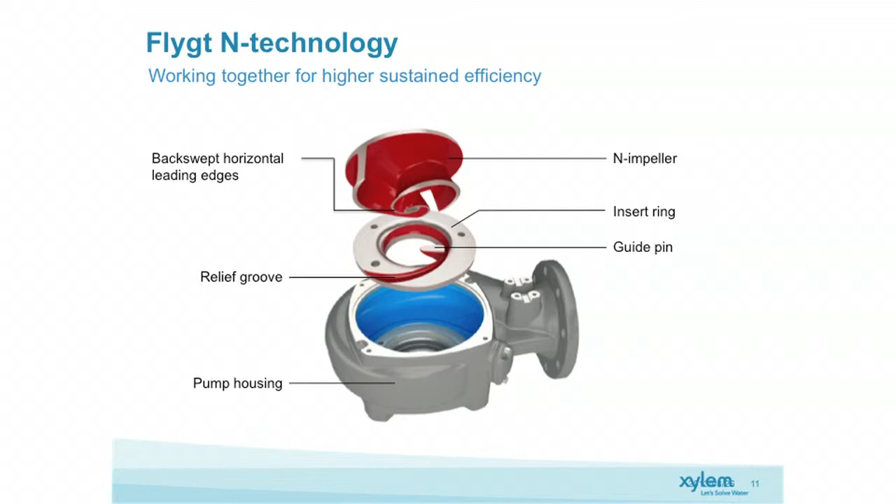So Flygt N technology is basically about three different functions that are working seamlessly together. First one is the back swept leading edges. You find them here. And this is the area that first hits the water. So please remember that. And then we have the guide pin. And last but not least, here painted in red, you can see the relief groove.

I have an animation with me, so I will be able to further illustrate how it's working. But before I do that, I will try to explain. So what's happening in the pump housing is that the debris will enter the inlet, and the back swept leading edges, together with the guide pin, will push the solids out to the outer edge of the pump housing. Then it will pass along the relief groove out through the volute and pump.

So the self-cleaning is actually about letting the solids slide along the leading edges out through the pump. This animation, here is from the side and here is from underneath. I will turn it on and explain again, but please first have a look at the smaller image here.

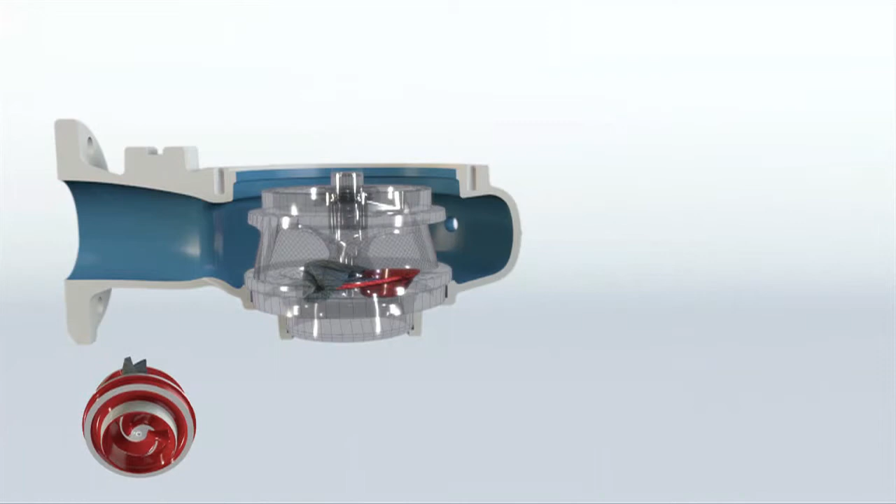So now you see the solid passing through the pump smoothly, and we take it in slow motion. And while the solids are passing, you will see how the leading edges together with the guide pin push the solids out, and then it's sliding along the relief groove. And this self-cleaning design will reduce the consumption of energy.

We often say that we deliver sustained high efficiency. I hope you know it by heart, but anyhow, I will explain it also. How can we achieve energy savings? When we look at typical conventional pumps, we have run tests in our laboratory, we can see that the debris is building up over time. And with sustained high efficiency, the definition of that is actually that the pump can keep its initial level of energy over time. That's the definition.

Meanwhile, with the conventional wastewater pump, what will happen is that the energy consumption will increase. It's using more power. And the reason for that is something that we call soft clogging. The debris is building up on the leading edges. It seems like the pump is running efficiently, but in truth, it uses more power.

Of course, you can run a pump intermittently. You start the pump, and over time the debris will build up and it uses more power, and then it stops, and the solids will be flushed away, and then the pump starts again, going up to the same energy level, etc. But over time this will also increase the energy level. But with an N-pump, you will have sustained efficiency over time. And that's why we say that you can save up to 25% energy with N-technology.

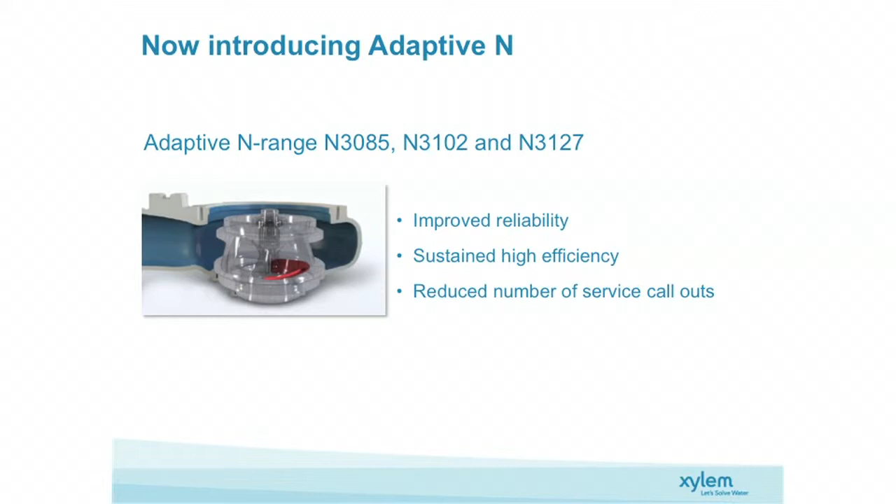Now we have a crystal clear picture of what an N-pump and N-technology is all about. And now I'm glad to introduce Adaptive N. The Adaptive N technology is based on the same principle as the N-technology. We are introducing it on the 3 smaller sizes in this range, up to 7.4 kilowatt. And what it will deliver to you is improved reliability. I will explain soon how. And it will still deliver sustained high efficiency. So the technology is actually about the smaller sizes of pumps.

It will run smoothly as it always has, but if larger debris enters the pump, it won't stop. What will happen is that the impeller will actually move upwards, and then the hydraulic pressure will take the impeller down to its original position. And this happens in just a split second. Another positive, apart from the reliability, is that the pump's lifetime will increase, since it reduces the stress on the seal and the bearings. So that's also a benefit that you will get.

I can talk a lot about animations and illustrations here today, but I think it's more exciting to see something from a real installation. So before I came here to talk about Adaptive N, we made a film in our laboratory. As you know, wastewater is unpredictable, but it's also hard to film. So what we have done is try to illustrate wastewater by using plastic bags, plastic bottles. We also have socks, t-shirts, dishcloths, and some underwear. Typical things that you can find in wastewater.

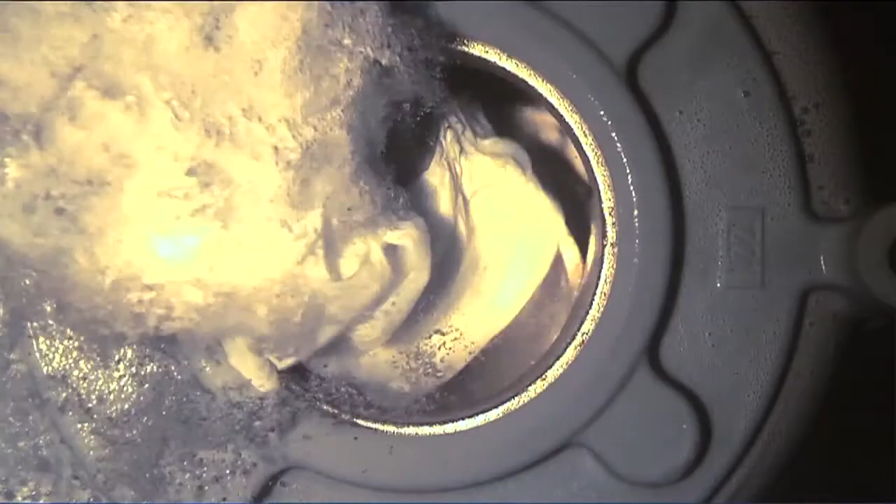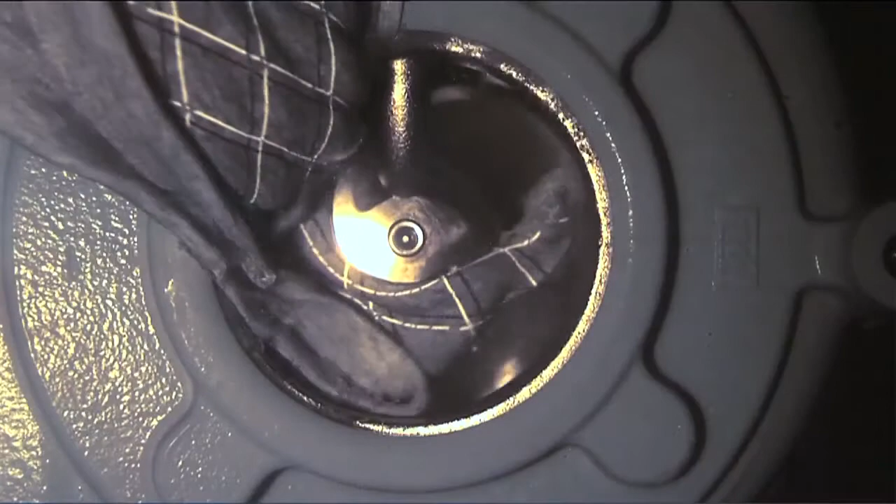So there is the plastic bag, bottle, that's the t-shirt. This is actually my favorite, the dishcloth, so have a close look soon. So now with your refreshed level of knowledge when it comes to N-technology, you can see how the solid was pushed through to the outer edge.

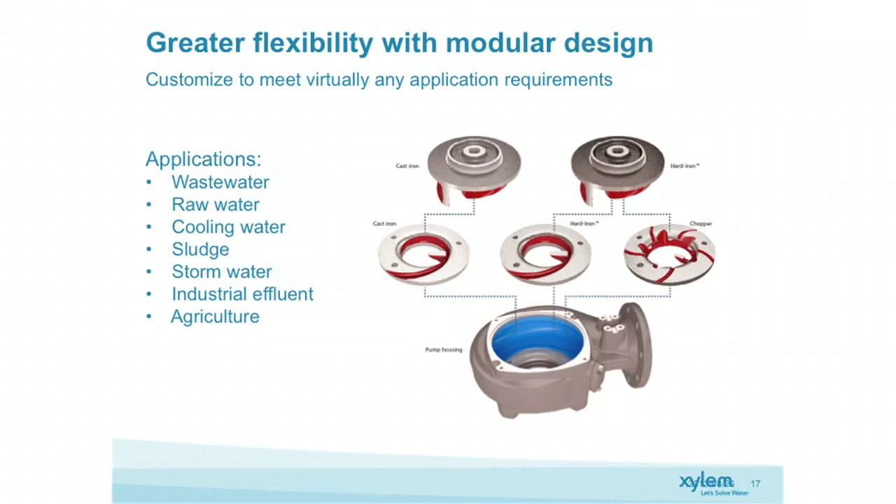With that, I also want to mention something that we have done to further enhance our N-technology, because there are challenging wastewater applications out there, and we want to have a broad offer for those as well. So we have developed new impeller materials. Our standard version for what I'd call normal wastewater is the cast iron impeller. But now we also have a hard iron impeller. Hard iron material is really suitable for applications with a lot of abrasives, like sand, for example.

And then we also have a chopper version. The chopper version is typically used in applications where you have long fibers. What the chopper version will do is actually cut the fibers into smaller pieces, letting the debris pass through smoothly.

And then, before we move on, because Flygt Experior has 3 new technologies, I just want to summarize the N-technology. It's about clog-free performance thanks to the self-cleaning functionality. You will be able to save up to 25% energy thanks to the sustained high efficiency. And we also have a broad product range, with different materials to choose between, depending on your specific need.

Okay, let's move on to the next one. It's about the motors. The motor is something that we have been working on since we introduced the first submersible pump in 1947. So this is nothing new for us. We even have our own department within our product development. But we haven't been so good at communicating our capabilities.

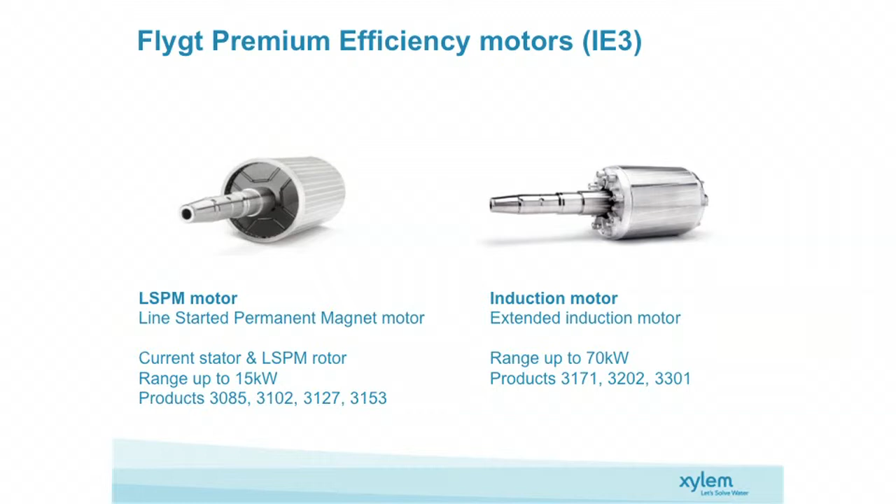But now it's time to introduce new premium efficiency motors on the full range up to 70 kilowatts. We have chosen 2 different motor technologies. For the larger ones, we have a conventional induction motor. But for the smaller ones, up to 15 kilowatts, we now have a totally new technology for motors. It is called LSPM, and it stands for Line-Started Permanent Magnet Motors.

The benefit with this new motor technology is that it can be started with any method since it's line started. But yet it will have all the advantages of a PM motor, a permanent magnet motor. That means that you will have high efficiency, and also the pump can be run very smoothly even if you reduce the speed of the motor. Additionally, you will also get a lower running current with this motor design.

Something that is very typical for a Flygt motor is that it is very small and compact, but yet very durable. I will come back to that later.

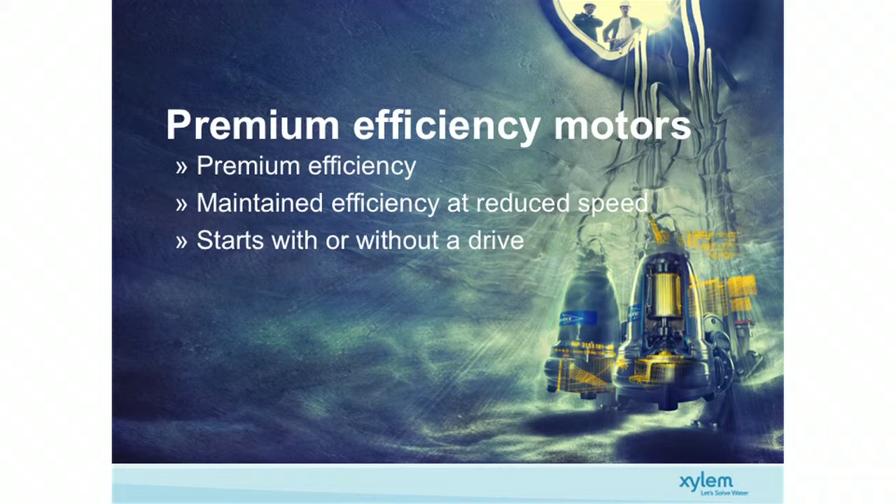So to summarize, premium efficiency motors. We have premium efficiency motors that meet the IE3 regulations on the full range. For the LSPM motors, we also supersede the nominal standard by 4%. For the LSPM motor, you will maintain efficiency at reduced speed, and you can start with any starting method. That means that you don't need to have a VFD for the smaller sizes.

And now for the most important part, a really new technology that we are bringing to the market, and that is the intelligence. Or as Benny said this morning, it's more than intelligence, it's really about being smart. And this new product is called SmartRun. Why did we choose then to focus on intelligence?

What we have seen during the past year is that customers more and more use VFDs to run the pump stations, to control them, which is good in itself. But we have seen that challenges often occur. Challenges such as odor, debris being built up, you can have clogging or sedimentation in pipes. And one of the reasons for that is that setting the parameters right for a VFD is quite difficult. It's very hard to optimize it for wastewater since it's so unpredictable.

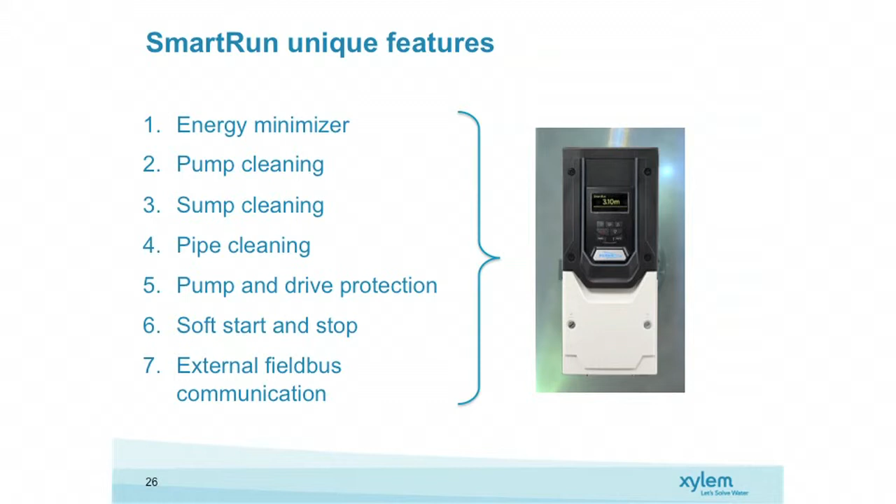And some of the functions that you can see in SmartRun are listed here. It's an energy minimizer, pump, sump and pipe cleaning, pump drive protection, soft start and stop, and then external fieldbus communication. So with those functionalities, you will be able to improve reliability and save up to 30% energy if you compare SmartRun with an on-off control.

I will now walk through these one by one and explain how they work. I will start with the energy minimizer. The energy minimizer is really, really unique. It's a patented solution. And what SmartRun actually will do is strive to run the pump at the optimal speed. So it will search for the optimal speed every day to find the best duty point depending on your specific system design.

This is something that normally requires a lot of calculation and theory, but now we have embedded the algorithm into SmartRun. And since this is such a unique feature, I take the opportunity to describe it a little bit further by introducing Hanna, my colleague from Sweden. Hanna is an application engineer, and with us we have an animation. I hand this over to you. Thank you.

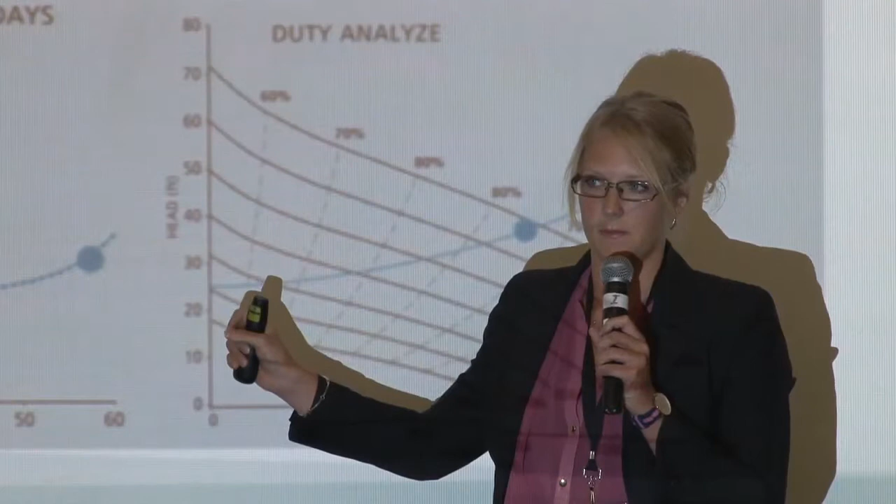And it does this by monitoring the energy that's consumed and also looking at the flow that's being pumped. And we usually talk about specific energy. And this is a specific energy graph. So specific energy is the energy consumed per pumped cubic meter of water. And for a specific system and a specific pump, you will get a specific energy curve looking something like this; it will be different depending on what system curve you have.

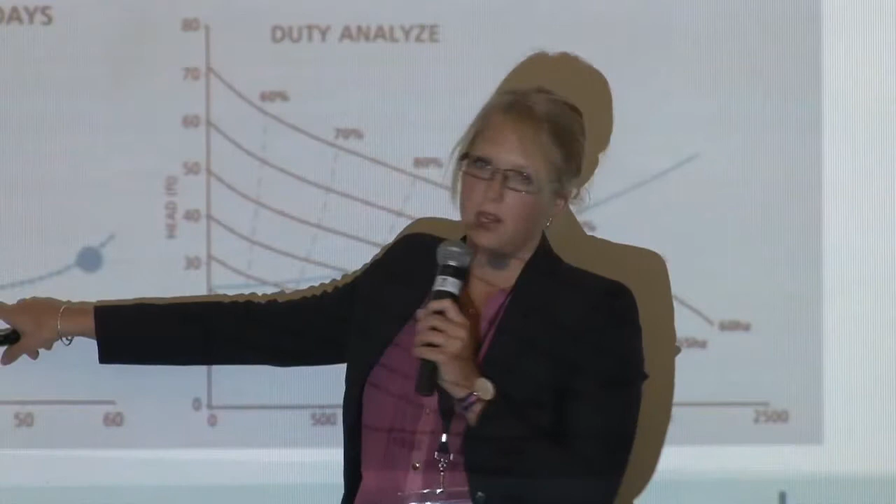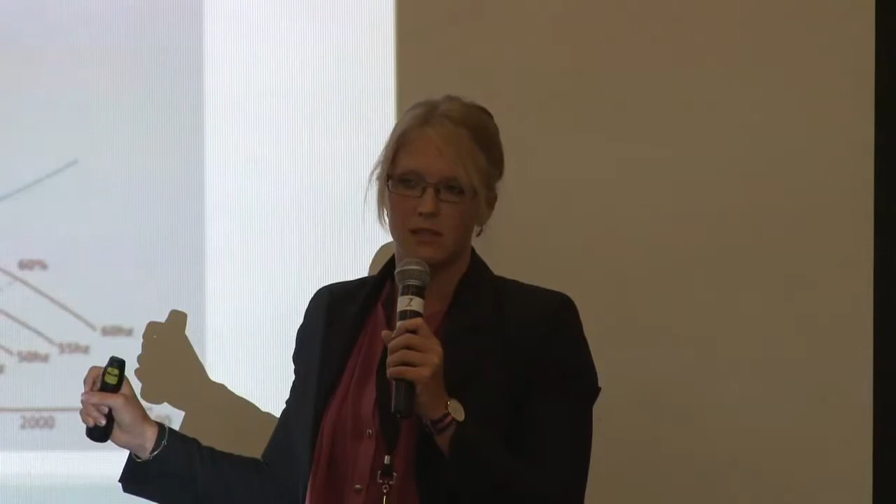So you have frequency here and specific energy. And as you see, there's always a lowest point on this curve. And this is the point that we want to run the pump at to be the most energy efficient. So SmartRun is always looking at its specific energy, going down in frequency and finding its lowest specific energy point, and will run the pump at that point.

So if you look at the graph at the top, we have pumped volume here. We have the frequency. This is actually a 60 Hertz pump, so it's going to start at 60 Hertz, then work its way down. And you can see the savings in energy when doing so. And here it says days; this pump is actually running just once a day. So it's going to change the frequency every time the pump runs. So if you have a pump running more often than once a day, it's going to find its optimum speed much faster. So it depends on how you run the pump.

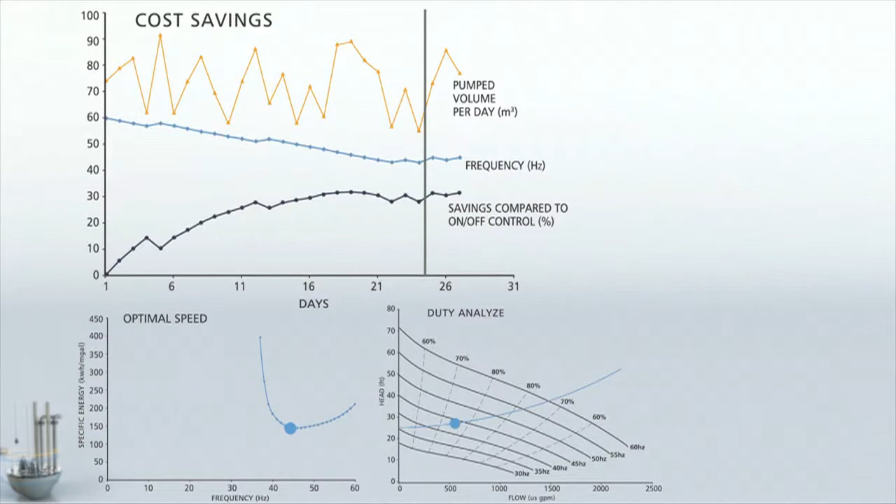And this is something that we will continue doing forever. So if you have some change of the system, maybe changing the water levels at the outlet, or something else changes to the pipes, you have higher losses or things like that, then it will adjust to the new conditions that you have. So you get automatic energy savings by just starting SmartRun.

Right. But then I have another question for you. When we are presenting Energy Minimizer, we often get the question about high inflow. Yes. As Veronica said, reliability is one of the main customer values, of course, with pumping. So we want to be energy efficient, and it's going to run at the most optimum speed for most of the time. Well, for almost all time.

But just in case that you have a really high inflow coming into the station, of course we want to adjust to that. So SmartRun is always also monitoring how the water level is going down. So if it notices that it's pumping at its optimum speed, but the water level is not going down, then it's gonna go up in frequency until it reaches the speed where the water is actually being pumped down. So we can take a look at this animation as well.

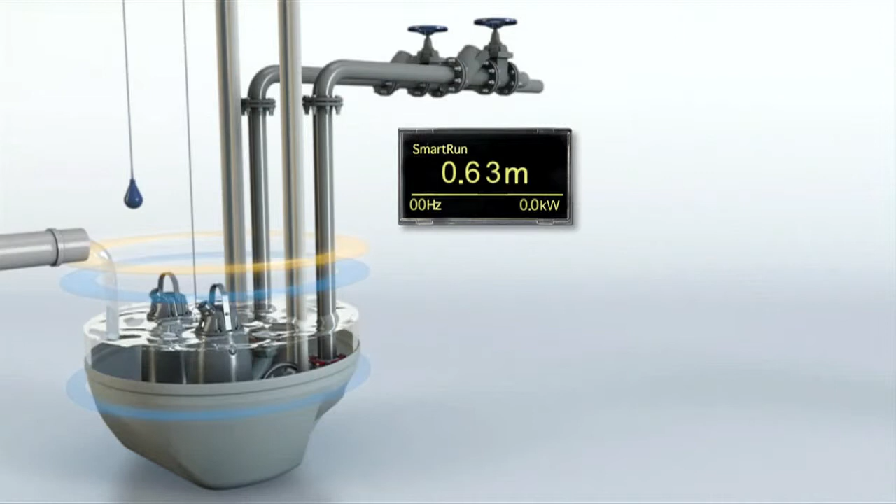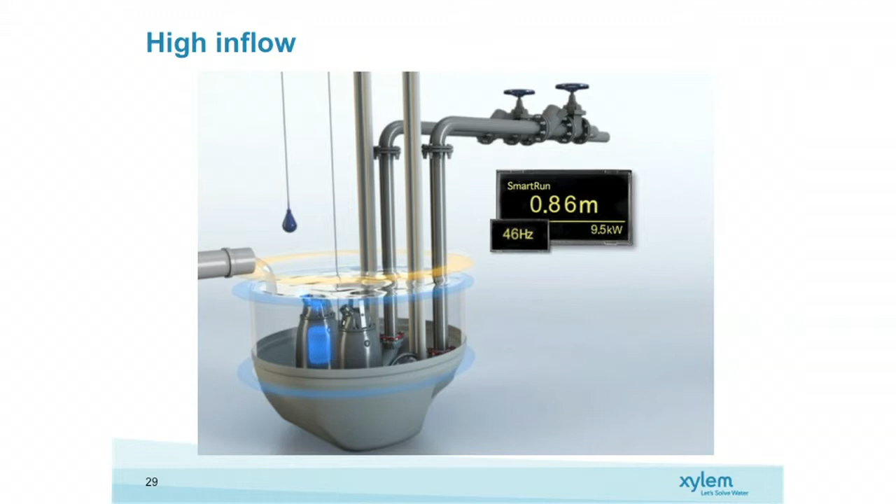So you're going to see the water level is going up, and it's going to start at optimum speed. But realizing, well, the water is not pumped down, I have to go up in frequency. But as you saw, it didn't have to go up to full speed. It just saw that, okay, with 46 Hertz, I have enough speed to actually pump down the water. So that way, we always make sure that we don't flood the station. It's always going to pump the water away.

And if you have a really extreme inflow someday, maybe it's a yearly rain or something like that, then it will actually trigger and start the second pump as well. Since we want to have reliability, we don't want to flood our stations. Right. Thank you.

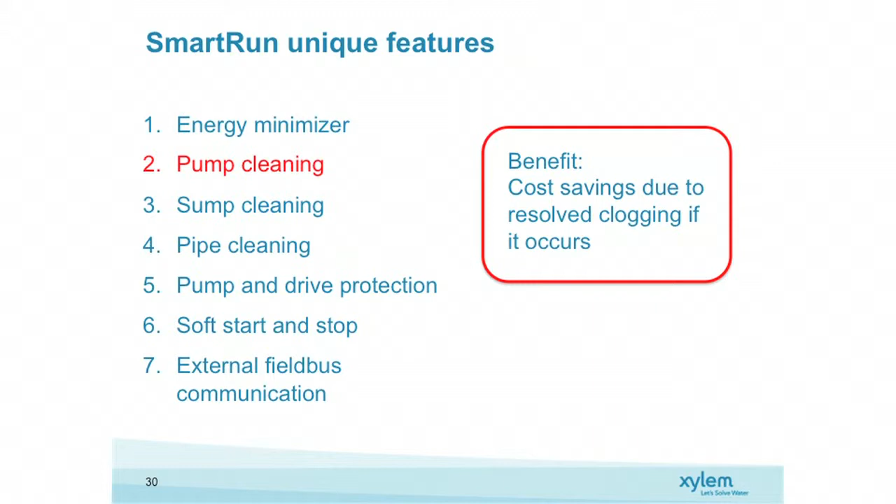And by that, I think it's time to move on to the second functionality. It's called pump cleaning, or as I rather call it, clog detection. The reason why we have developed this function is because we want to be sure that the pump is running trouble-free. In case a normal sized object is in the impeller, SmartRun will detect that and start a cleaning cycle. That means that the impeller will run back and forward until the debris has been released.

Then sump cleaning. What SmartRun will do here is that it will run down to a snoring level, and then it will pump away the floating debris and also the sedimentation in the sump. So what you will get is less odor and of course a clean sump bottom, but also you will reduce the labor and maintenance cost. And in cases if you have to do this work manually, this will also be reduced, of course.

Pipe cleaning is about taking away sedimentations in the pipe. So SmartRun will start the cleaning cycle at full speed so that the sand, etc. in the pipes will be moved away into the system. Actually, the pipe cleaning is taking place every 12th cycle today, together with the sump cleaning.

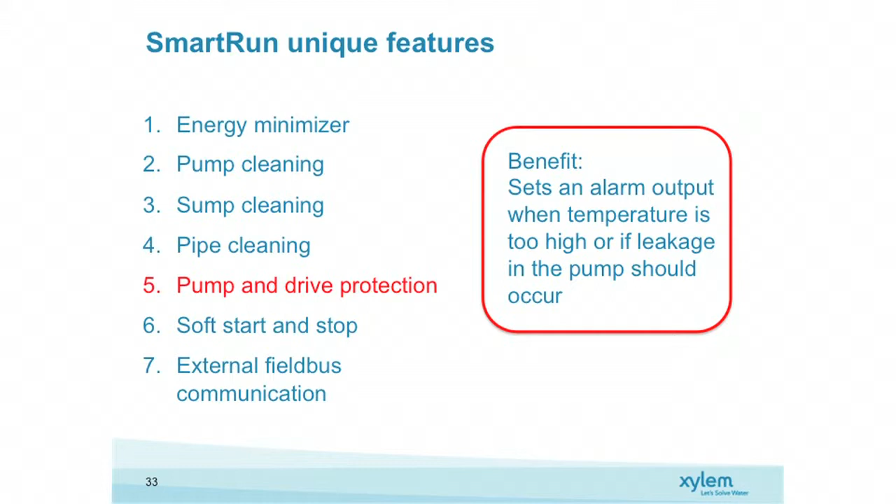Then we have the pump and drive protection. Of course, it's essential to get an alarm if the pump is overheated or in case there is leakage into the pump. And SmartRun will then send an alarm.

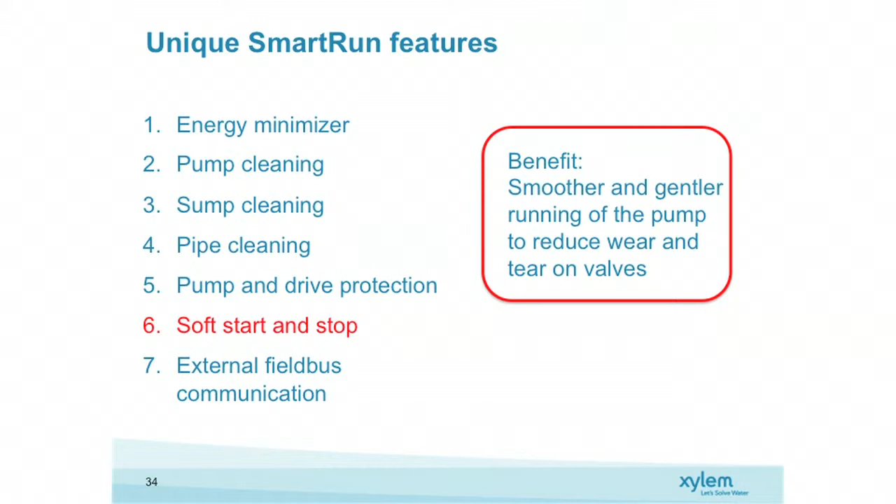We also have the soft start and stop. That means that we will run the pump very gently. We will slowly ramp up at start and slowly ramp down at stop. That means that the lifetime of the valves will be prolonged, and at the same time we reduce the wear and tear. And additionally, this function will also make sure that you don't have any water hammer effects in your piping system.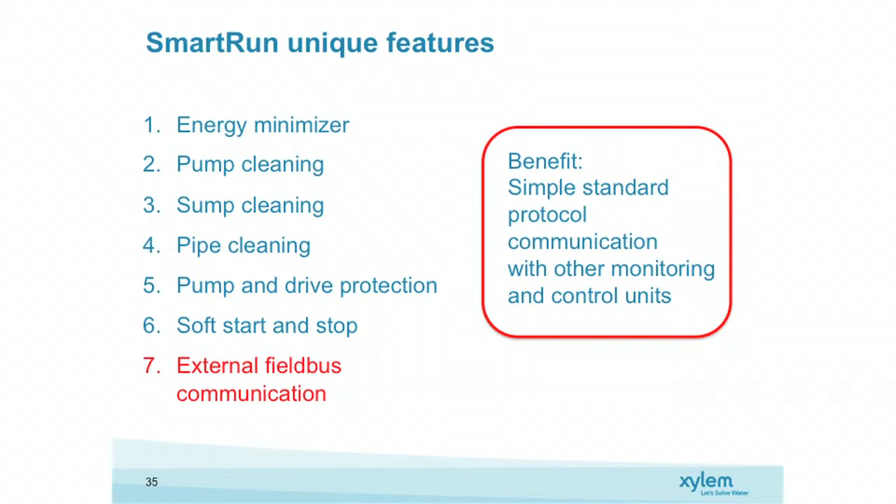One common question that we get is if SmartRun has a high capability to communicate with other systems. And the answer is yes, because we are utilizing Modbus. But in case you need to have other protocols, we have that as options as well. So all those functions are embedded, pre-programmed and preset. So it's really optimized for wastewater pump stations.

Again, to summarize them, as I said, pre-programmed and easy to install. You just have to press the button. You can reduce energy up to 30% if you compare SmartRun with a traditional on-off control. And also, the reliability will be improved thanks to the pump, sump, and pipe cleaning functionalities.

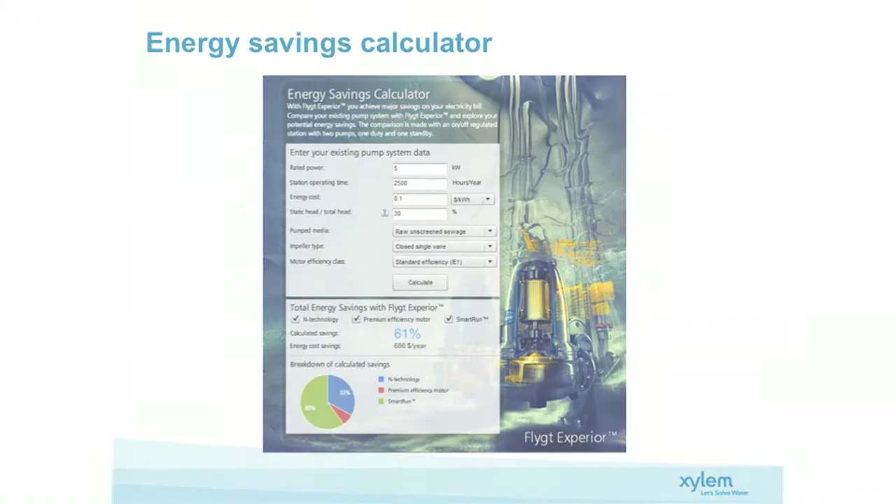Just to illustrate, we kind of like illustration and interactions. I have an energy calculator with me today. We state a lot how much energy you can save. But based on our experience, we have developed these tools so we are able to set the parameters depending on a specific pump station. So let us do one demonstration of this. I will walk this through together with you now, and in the breaks or when we're having a cocktail later today, we can show how it's working and do some calculation depending on your specific system.

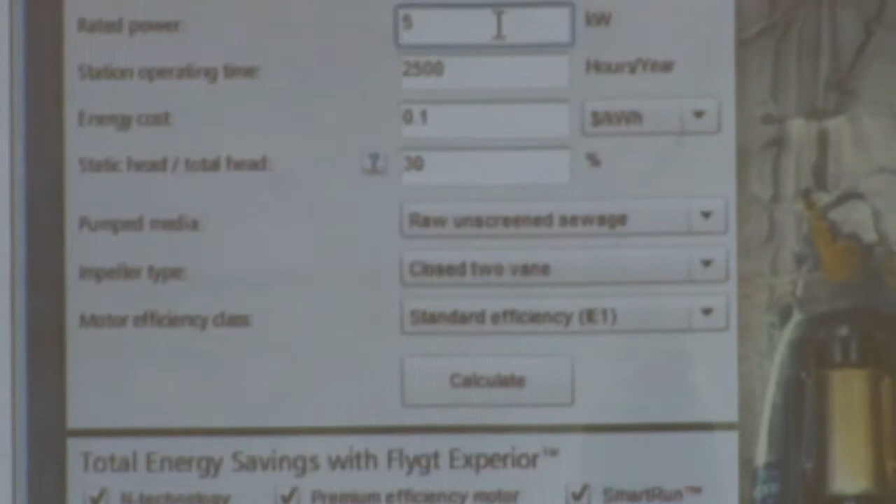So what we will do is to enter different parameters. If you have any suggestions, you're of course free to come up with them. We can increase the size of the pump, for example. Should we say 22 kilowatt? Then we have to enter the operating time. Any ideas? Or shall we keep 2,500 hours? Someone is agreeing? Okay, we keep that then.

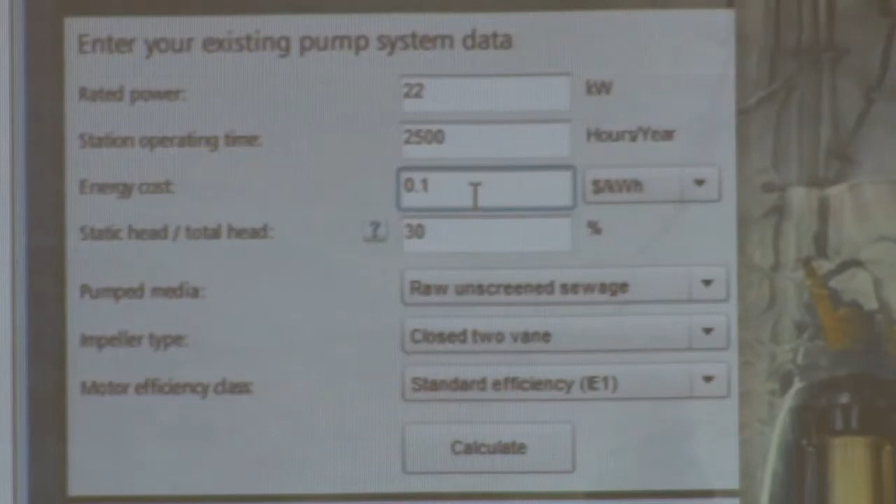You mentioned 50 cents as an energy cost here, US money in dollars. Is that correct as a parameter? The cost of energy? Is that reasonable? Point one was correct. This is in dollars, sorry, in euro or dollars? In dollars. 0.1. Like this. Sorry, thank you.

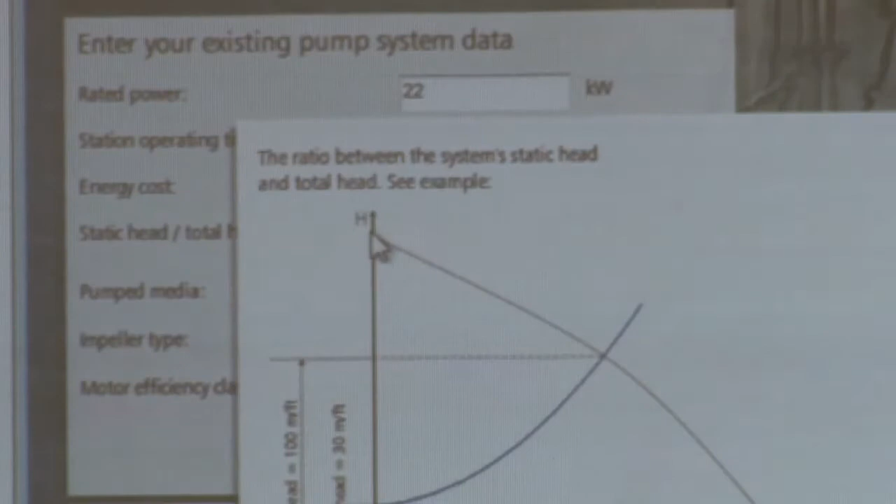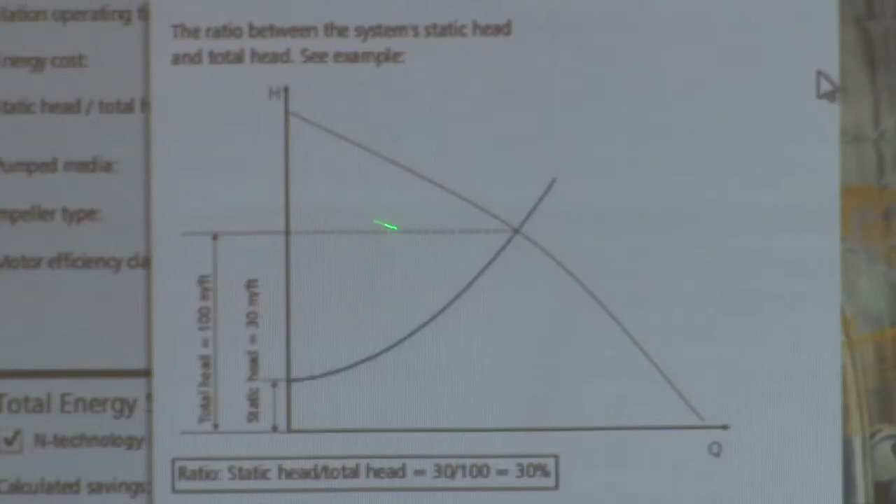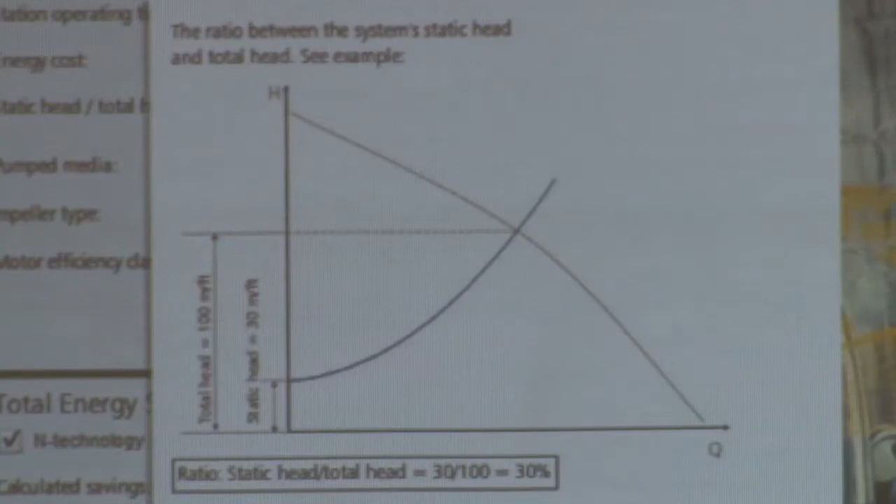And then we have the static head. I can show this illustration. We have added this so we can be sure that we get the correct data, because you need correct data to calculate. What it's all about is defining the ratio between static head and the total head. Here you can see a typical pump curve, and here's your duty point. That means that you have the total head here. Meanwhile, you also have to fill in the static head for your specific system. So by dividing those two parameters, you will have the ratio. In this case, it is 30%. We could increase it to 40, just to play around a little bit with the figures.

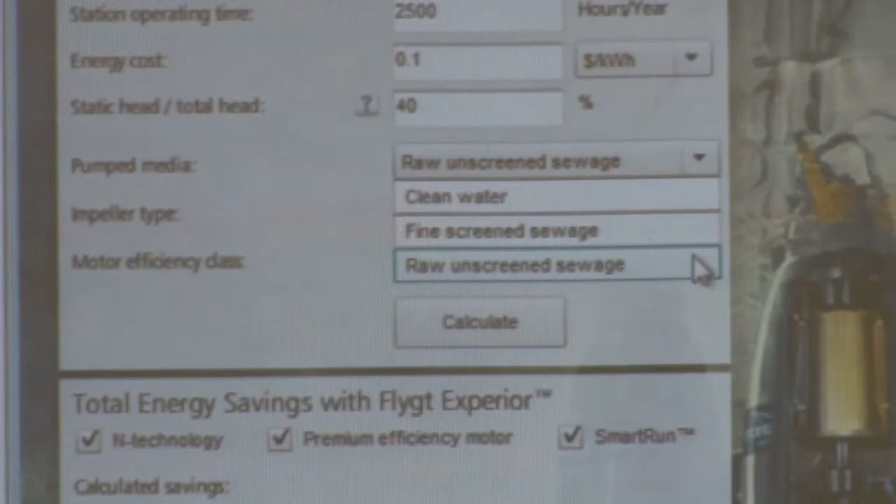Then you need to define, depending on your application, what kind of pump media you have. Here you can choose between clean water, fine screened sewage, or raw unscreened sewage. Any ideas? Raw, okay. And then we have the impeller type: open single vane, closed single vane, closed two vane. N-technology, maybe not in this case, screw or vortex. What is your best option? Closed two.

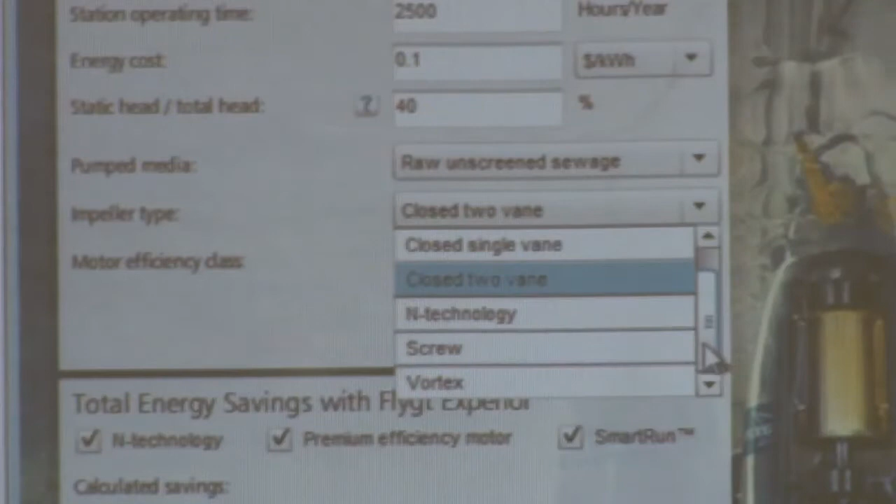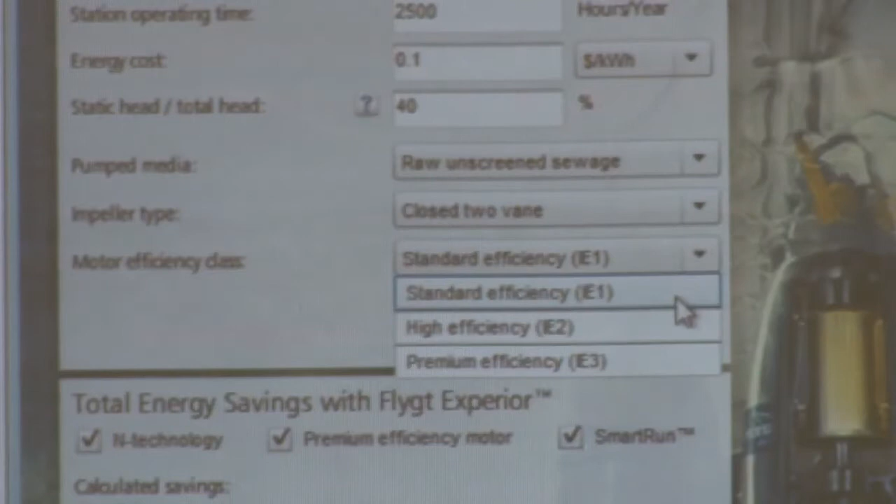And then we must define the motor efficiency. We have 3 different standards, the IE1, IE2, and IE3. My suggestion is to go with IE1 since it's most common. You agree, I can see, loud and clear. And now we are pressing the button.

That was good timing. Thank you for that.

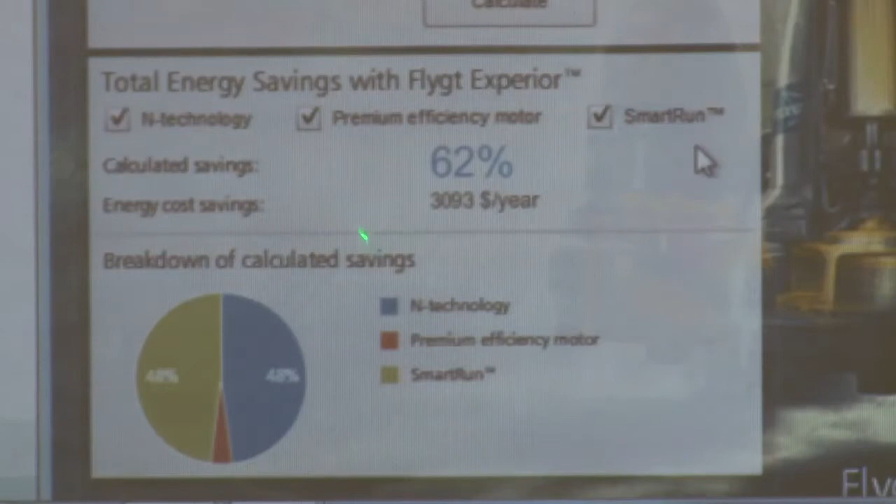If you don't want to add a premium efficiency motor to your Experior pump as an option, you can take it away and then we recalculate. And in this case, it's 50-50. So Flygt Experior, the way I should put it, my perception is that we have developed Flygt Experior with the premise that a premium efficiency motor always needs to be combined with state-of-the-art intelligent control and our superior hydraulic design. Because here is where you can find the savings.

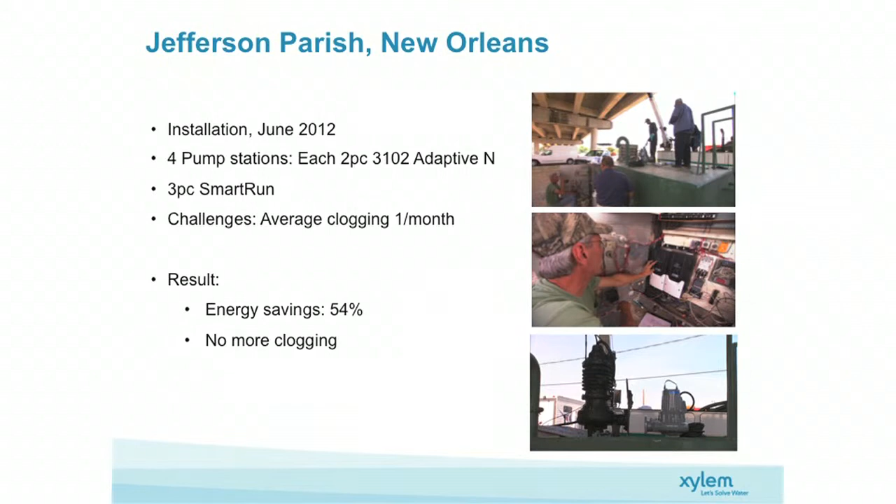So I will start first with a case from the US, from New Orleans, Jefferson Parish. The installation we did was in June last year. They had 4 pump stations with duplex installation. The problem they had was clogging. The pumps clogged about once a month, and one of the 4 pump stations even clogged two to three times per day. And now we are talking maintenance money. We installed adaptive N, and after the installation they haven't had any clogging at all.

And just to put some figures on that, one call-out costs about $400 US. You have to send 2 men, an electrician and a mechanical guy. So not only have they saved money on maintenance, but they have also freed up time for their resources. We also installed smart run, and they saved 54% of the energy cost. When we started the pump, the frequency was 60, and then only after 2 days it went down to 38.

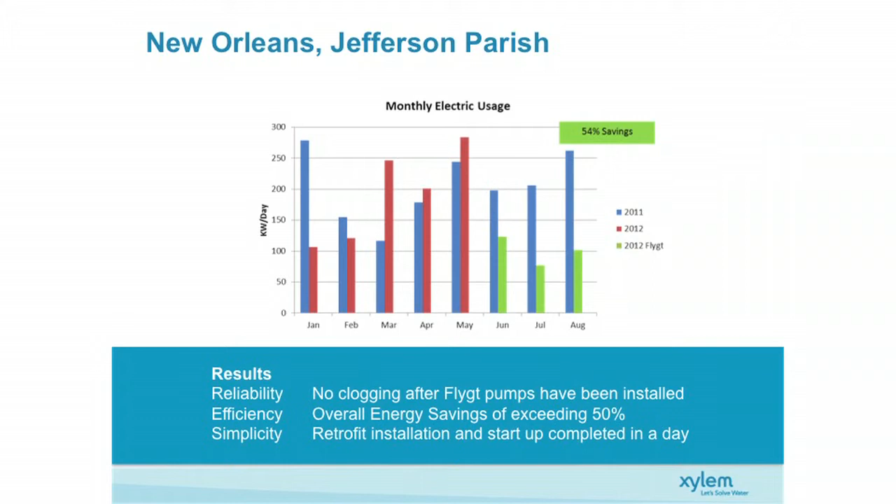Just to give you some graphs on that, you can see here in blue and red the electricity usage for 2011 and 2012. And we know it's changing year by year depending on weather conditions, etc. But in June 2012 we installed Flygt Experior, and since then you can see that we have reduced the energy. One thing I think is also worth mentioning, because I'm talking about simplicity, is that the retrofit installation only took 1 day. So this is really a good way to illustrate what we can achieve with Flygt Experior.

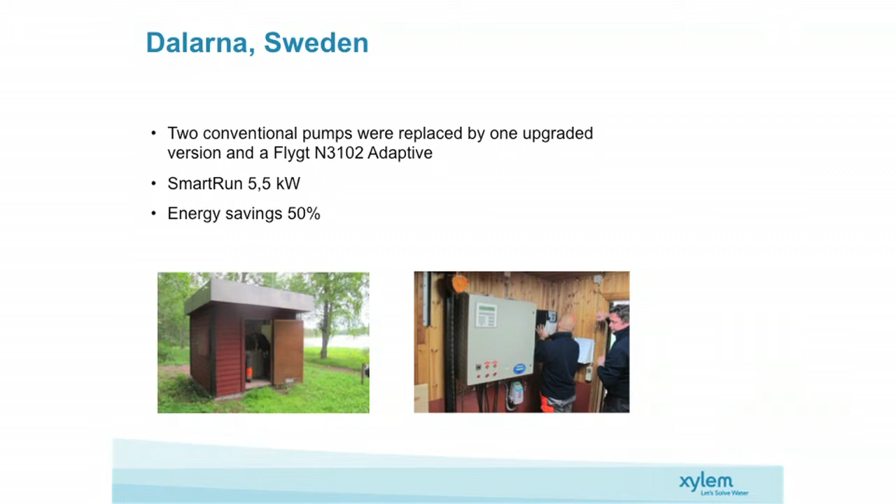And then, of course, I have a case from Sweden, which is close to my heart. We have 1 pump station in the middle of Sweden with 2 conventional pumps, 2 competitor pumps. The customer chose to upgrade one of the conventional pumps, and the second one we changed to an N pump with adaptive N. We also installed smart run in this installation, and we saved 50% of the energy.

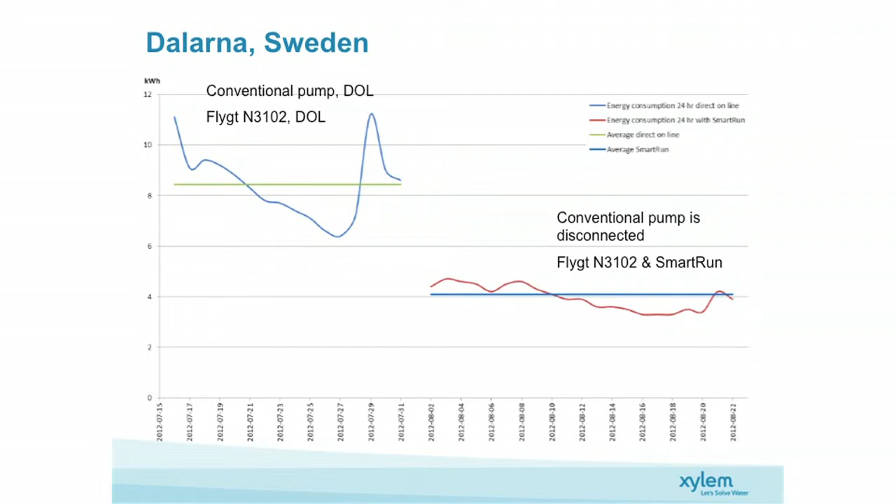I will show you here on this graph and walk it through with you. Here we have the conventional pumps running direct on line. The blue curve is the actual curve, while the green one is the average. Then we have the same, but now running the pump station only with an adaptive N pump together with SmartRun. And you can see that we have reduced the energy to 4, and before that it was slightly above 8 kilowatt hours. So this is how we can achieve 50% savings.

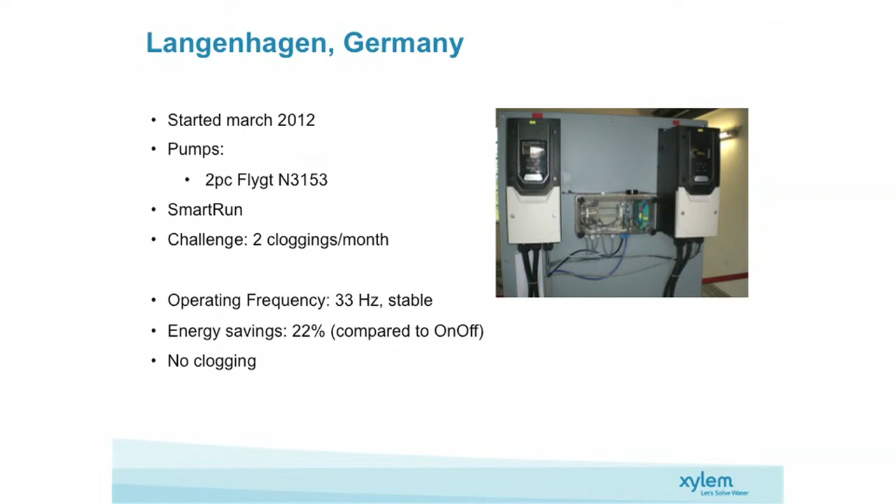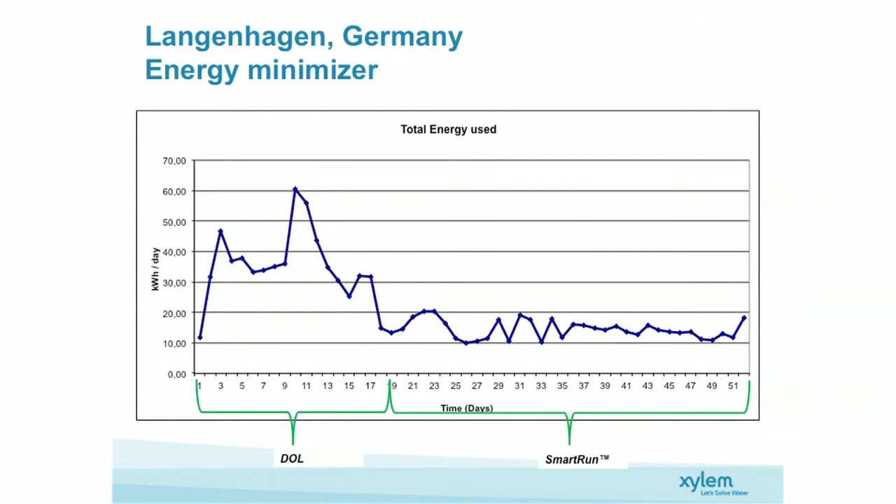Last but not least, in Langenhagen in Germany, we have installed SmartRun and also Flygt N pumps. As you can see, their challenge was clogging, 2 cloggings per month. What we have done is reduce energy by 22%, and we have no clogging today. And here you can see the curve as well. Here is direct online, and then with SmartRun, we have reduced the energy consumption. Interesting here is to see, as Hannah explained, how fast SmartRun will adjust the frequency. Within only 1 day you can reduce the energy.

So to summarize Flygt Experior, with the hydraulics, intelligence and the motor, we now have unmatched reliability for wastewater pumping stations. You are able to reduce the energy by 50%, and it's easy to use, easy to install and operate. So with that I have, of course, another film. This is the official launch film of Flygt Experior.